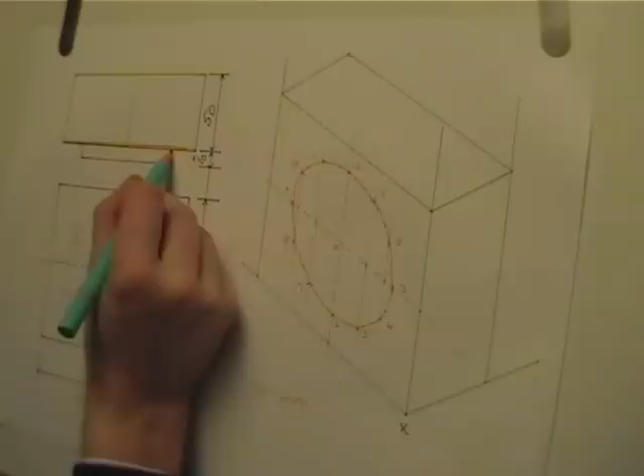Notice the circle comes out going in this direction, which is parallel to this edge here. Remember, this edge is this one. So what I have to do is go to each of these construction points and project a line out in this direction. That's what I'm going to do now.

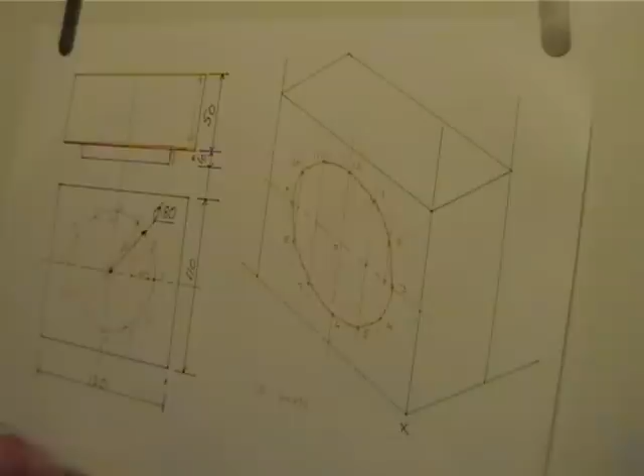I take my set square, and this is where we really have to try and focus on things. I'm going to switch colour of pen from orange to green. Every one of these points has to be projected in this direction at 30 degrees.

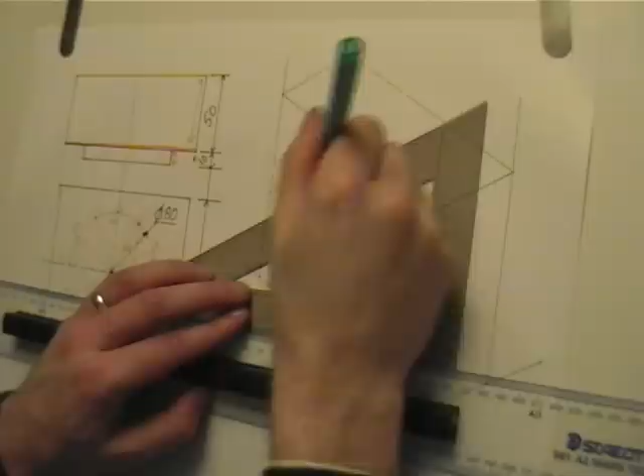I'm going to quickly just do a little short line at each point. Some of them overlap, which makes it a little awkward to follow, but just keep your eye on the numbers and you won't go wrong. I'm only projecting out 10mm, so it's not terribly far. Again, this one almost overlaps.

6, 7, 8, and finally point number 9.

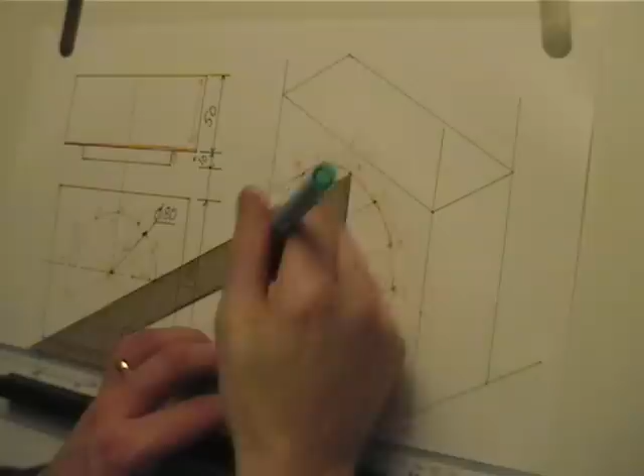So I've now got all my little points, like little needles coming from the front. Each one has to be 10mm long, because this part from here to here, I'm told that's 10mm. So I have to take each of these little lines and make sure they're 10.

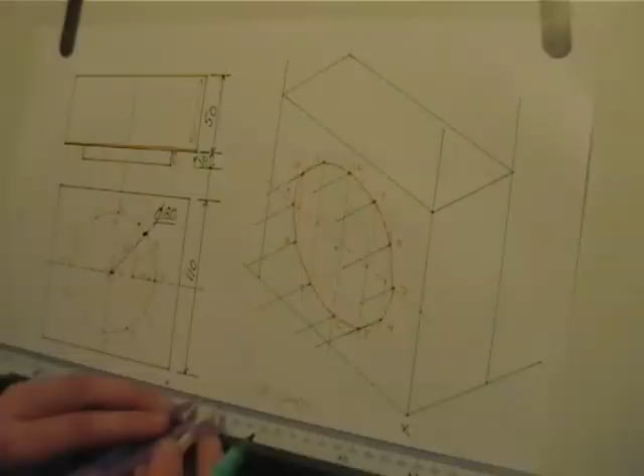I could do it with a ruler, but I'm just going to step off 10mm using my rule here and my compass, and go around and step off 10 in each one. Being really careful at the points where it overlaps, because it's very easy to miss a point.

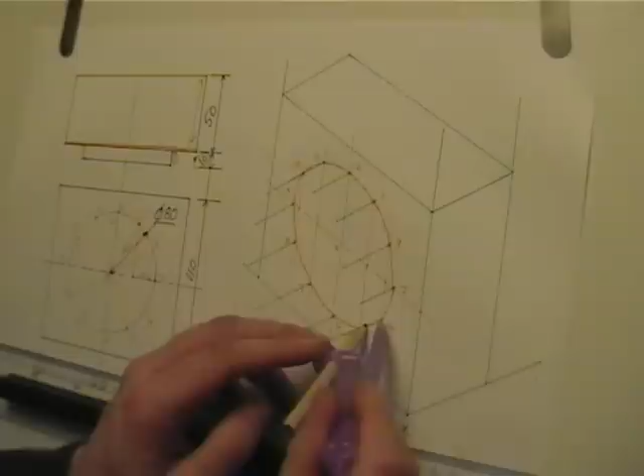What I'm drawing here is a circle parallel to the one I've already drawn. Parallel circle means it should look the same, but it's stepped out a distance. So here are all my points, I'll just make them a little more obvious. There's a point there, one there, one there, one there, and all the way around.

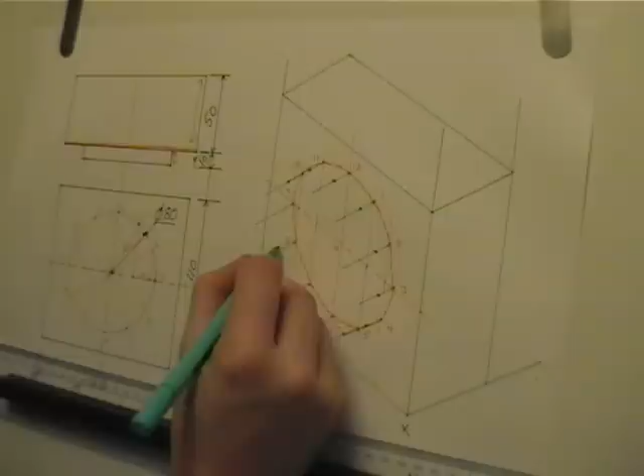Now, the clever ones amongst you will begin to see where that circle's coming from. So what I'm going to do is join it together again, taking the best smooth curve that I can manage, going around each of the points.

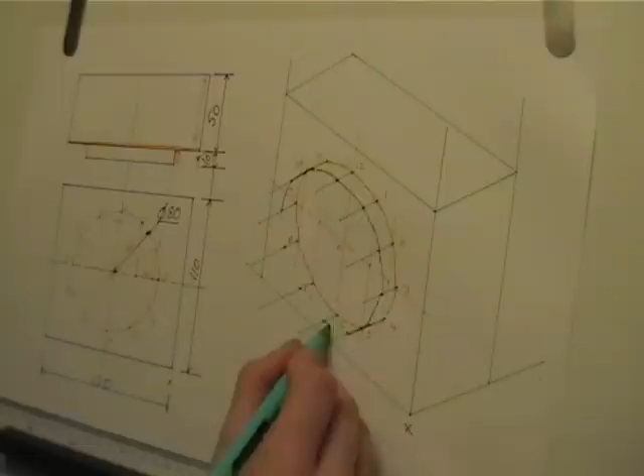Remember, when you're doing this, you can get off your seat, and even move round to try and keep your hand on the inside of the curve. Gradually just finishing off, final 2 points.

So I now have my orange circle, which is on the surface, and a green circle which is stepped out from the surface. What I'm going to do now is line them in black so you can see what the finished outline looks like.

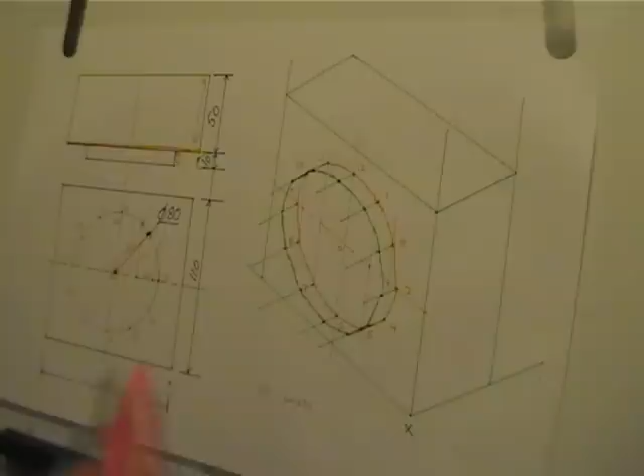I know that I'm going to see all of the green circle because that's the part closest to me. What I'm not sure about is how much of the orange circle is obscured. So very quickly, back round to my green circle again.

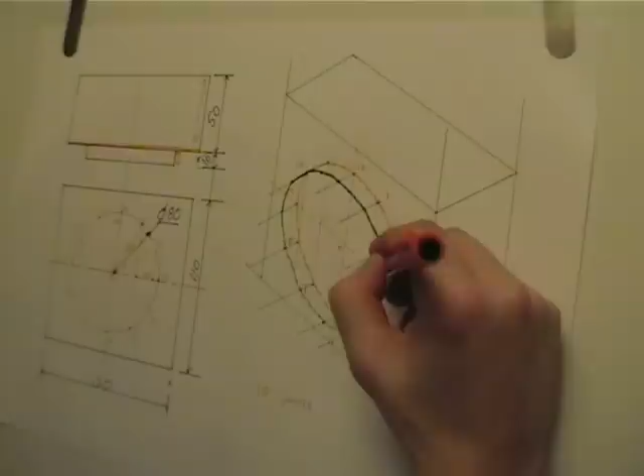Remember, when you're doing this, you can unclip the paper if you like. You can step up, walk round about your desk, that's all perfectly fine. It's very awkward when your hand is not inside the circle.

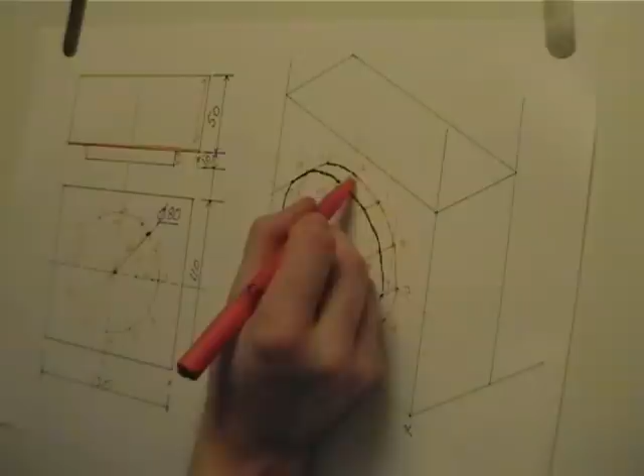So what I can see from this is, there's my circle at the front. I won't be able to see this part of the surface circle because it's hidden by it. So it's really easy for me to go around and line in the back part, which is still visible, the part which isn't hidden.

Now what happens is, when I get to these points, I'm not quite sure what happens. Something happens, I know, but I'm not dead sure what. There must be some way that this is joined up. The clue is this little straight edge here. What that tells me is that the back circle and the front circle are joined by a straight line.

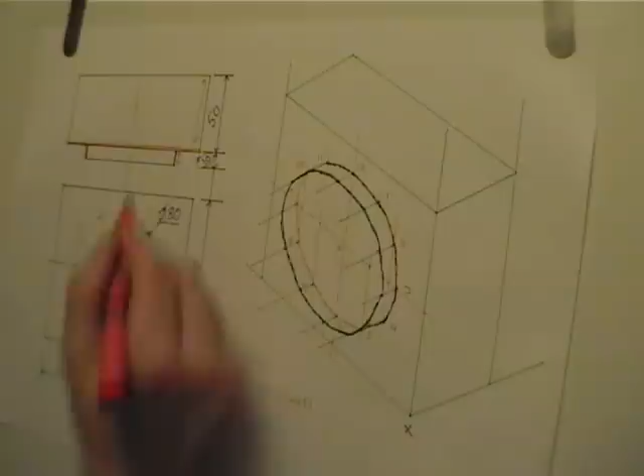How we find that straight line is, we take our 60-30 set square and slide it across until it just kisses both circles at the same time. Where it kisses them, we draw a little straight line. Move it up to the top of the page. Where it kisses both circles at the same time, it's called a tangent point. We draw a little straight line.

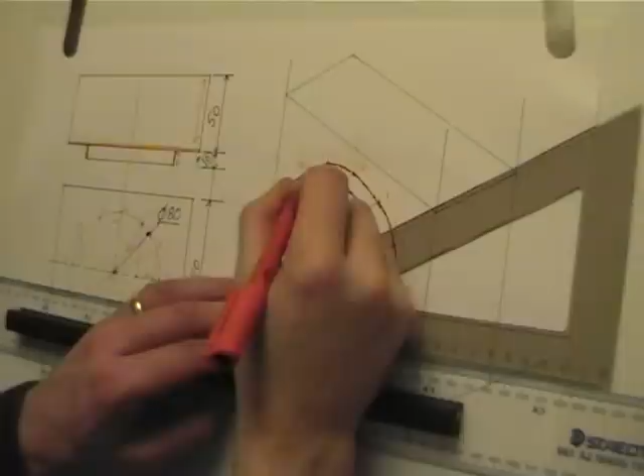And that gives me the finishing of that edge, and the finishing of that edge. My final task, should I wish to, is to go back round the drawing and just line in the final outline.

Remember, in a test or an exam of any kind, you will get extra marks for going round and finishing in your drawing. We're concentrating on neatness, so at the corners make sure you don't cross over. Make sure you actually join the lines up and don't leave a little gap in between them.

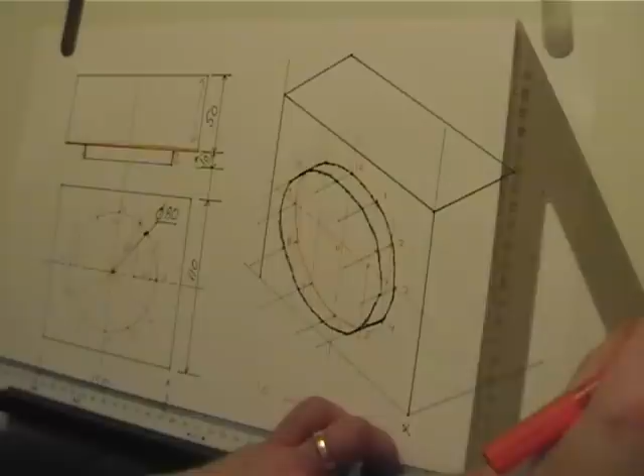If you've done proper construction lines, nice and light, there shouldn't really be anything to rub out. If you have to rub them out, it's going to make a mess of your drawing. Obviously I've done mine in felt tip pen, so I won't be rubbing anything out. And don't ever put Tipp-Ex near a drawing board. Once you get Tipp-Ex on it, you'll never get it off.

And the final line at the front, from there down to there.

So what we've got there is one method of drawing an isometric circle flat on a surface, and I've also shown you how to take it from that surface and project it out, because it's very unusual in real life to have a circle on the surface. It's generally something like a camera lens, a candlestick holder, or a button, something raised from the surface. So what you've seen there is a way how to do it.

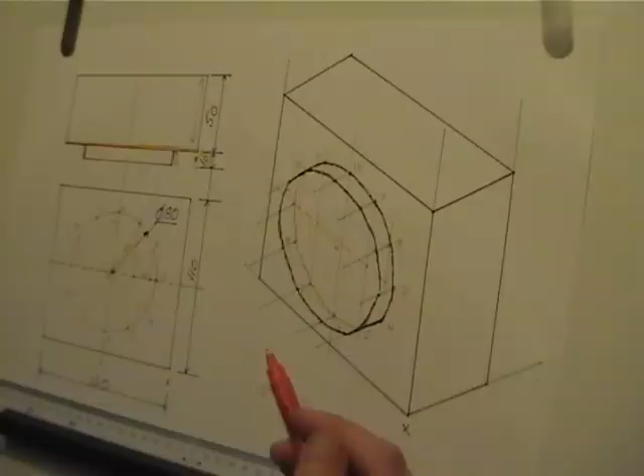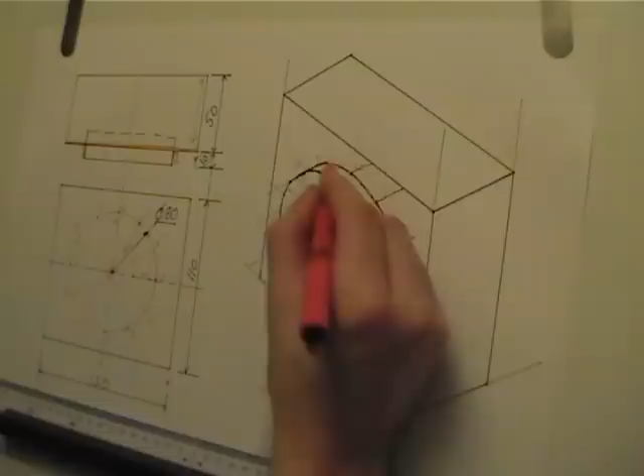If alternatively it was not a button sticking out the front but actually a recess going in, for example in a candlestick holder where it's a slot to put the candle in, the process is the same, except this time instead of projecting out towards the front, these lines would have gone back in that direction and measured back 10mm instead of measuring out 10mm.